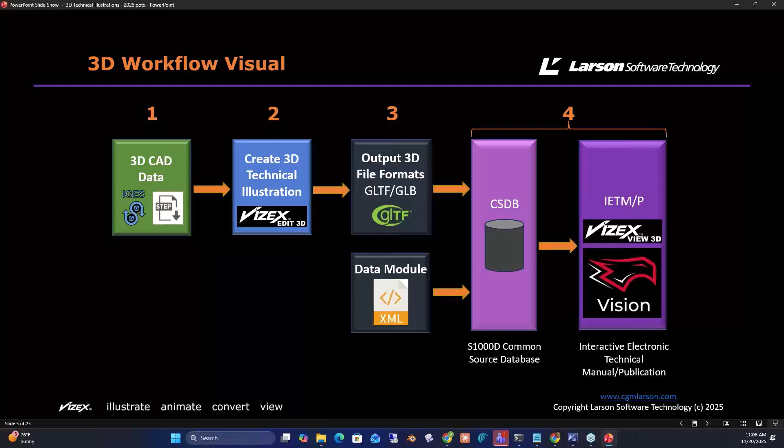From there, we're not actually going to create any XML today, but we will show the IETM. Both those components would go into the CSDB, so even the GLTF would go in there. It would probably have an ICN number because it's media, or if it's an S1000D project - it could, if it's not S1000D, then it could be named pretty much anything and stored anywhere. And then we're managing the data, so this could be a content management system of some type. Finally, we'd distribute this information in an IETM, where that data is built into something the maintainer or end user can view in a way that enables them to do their procedures and so forth.

So the first step is actually getting the data. How do we get it? Where do we get it from? Well, primarily it's going to come from a CAD system, from engineering. The exchange formats that we support within VizEx Edit 3D, we support more than these, but the primary one has been STEP so far. Most organizations will export the CAD data into this format. It's an open format, and it's very rich, with all the geometry and the model tree that we need to start working with it for creating technical illustrations.

Most CAD systems will support STEP, probably pretty much all of them. It's useful because it's usually readily available from the engineering department. One main consideration when you start using this data is file size, so you'd need a computer capable of handling quite large files. We do some optimization as we bring them into our system, but to initially use them, you'd need a machine of reasonable specification.

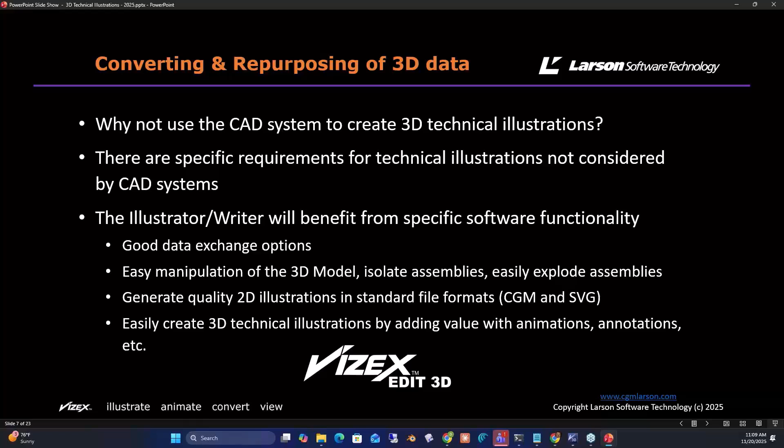So as an overview, what kind of illustrations are suitable for 3D? We think it's pretty much everything you would do in 2D - exploded spare parts illustrations, procedural illustrations for assembly, disassembly, scheduled and unscheduled maintenance, repair and overhaul. Even operational and instructional illustrations, and specialist illustrations that may have transparency to see inside the equipment, cutaways to see inside with sectional views, and functional illustrations showing how it works. All of these probably apply to 3D as well as 2D.

So how do we create them? In VizEx Edit 3D, we can import that CAD data - STEP and IGES files - and we save them when we bring them in as what we call a .vx3d file, which is our kind of native format. You would say, well, why do we need another 3D format? Aren't there enough on the market already? But the reason we did this is that we can optimize the file size.

We can work with them, save changes to the file easily, go back and work on them again, edit them, or if we don't finish them, revisit and start again to finish the illustration off. So we didn't really find a suitable format - certainly STEP would not be suitable to do that with - so we created this VX3D file.

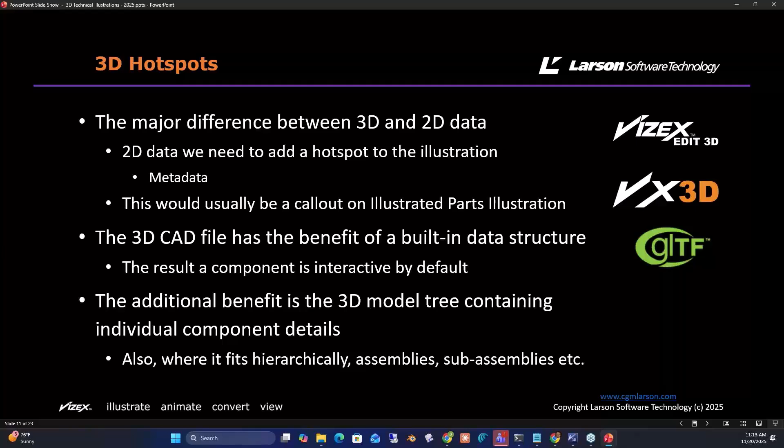The other benefit is that we can animate this as well. So the data structure really allows us to select those components, perhaps move them, control their visibility, and then transform them as well. Like we could rotate them, scale them. And this is all in 3D, so this ability is kind of built in.

We'll talk about GLTF and GLB a bit more in a second, but GLTF and GLB give us that ability to capture that animation, record it, and then play that back in an environment suitable for the maintainer. So I'll talk about the GLTF. I think it's the next slide.

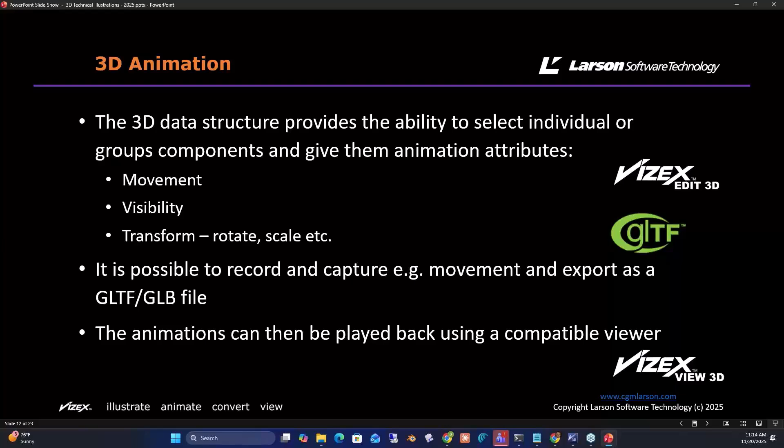It is. So why GLTF? The main reason we selected this format for our output is that it's an ISO standard, so it's an open file format, which we felt is important for standards-based industries, especially people who use S1000D, companies using S1000D.

That the narrative really is to use open file formats. It's web native, so there's no plugins required for viewing, which is really a good thing with security and things like that. It supports animation to be part of the file, so movement, visibility, rotation. It's efficient, it does compress the file down, so it makes the file lighter.

It's got good universal support from some of the large vendors such as Microsoft and Adobe. With Microsoft you can actually insert GLTF files or GLB files into PowerPoint and Word and so forth. So we really think that gives everything a future proof, that this format is going to be around for a substantial number of years. So that was the other reason for choosing it.

You probably heard me say GLB. So the GLTF and GLB are one and the same thing. It's just a different way of actually saving the file.

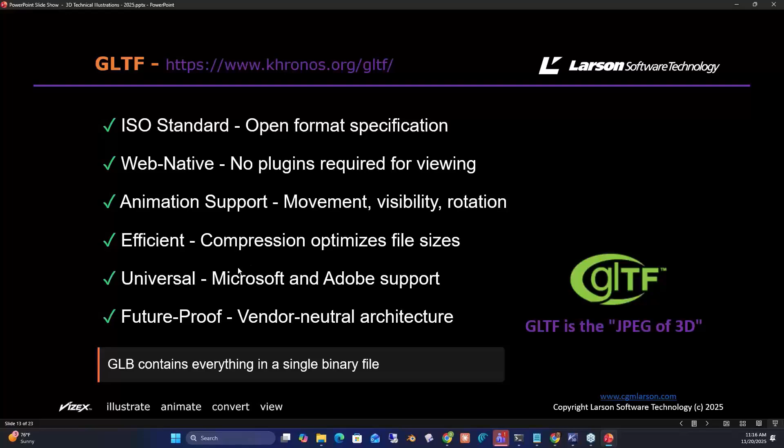Oh dear, my audio's gone. Don, could you just reinforce that you still can't hear me? I'm talking at the moment. Okay, I'll carry on talking. Hopefully the audio returns. As I said, we've had some technical difficulties today.

So just moving on to S1000D and what the stance is from S1000D on 3D. There is a chapter in the current spec, it's kind of a bit outdated, but there is no 3D file format specified as well, and that's why we really selected GLTF.

Okay, very good. So the next part really is a demonstration. So I'm going to go into VizEx Edit 3D. Hopefully you can all hear me. And we'll just go through the process I've just outlined in the previous slides.

Okay, so let's just go to VizEx Edit 3D. So this is the interface. We've tried to make this as easy as possible to use, as I mentioned earlier.

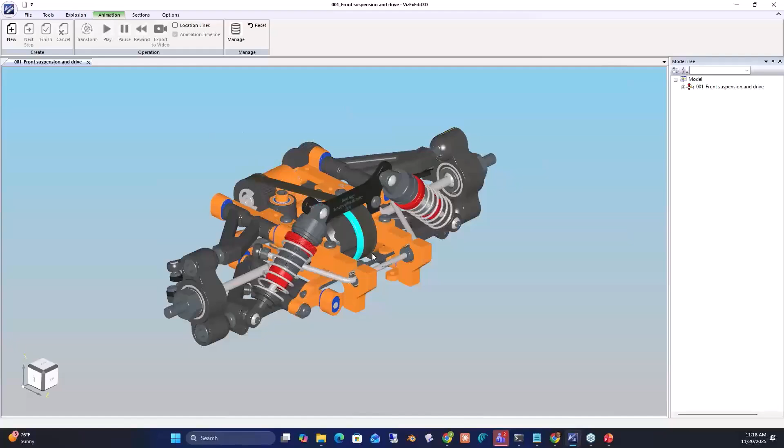This model is fairly large. It's not an enormous model, but I've just brought it in for expediency, just for the webinar. So this is the whole of a front suspension unit. I can move this around pretty easily. I can zoom in, so it's pretty easy to use the model, even though it's quite a large one.

So at this point, I could say I want to select a particular part. So you'll see on the right that that part is highlighted in the model tree. So any part I click on here, then that's going to be highlighted. If it's part of an assembly, you can begin to see, on the right, the whole of the part subassembly here, which you then could use perhaps in a separate illustration. And I'll show you how to do that next.

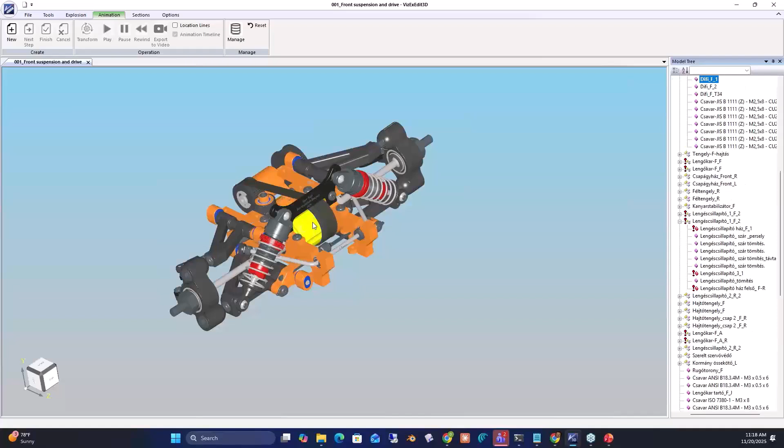So I'm going to use this particular one here, which is part of the differential unit. So if I select this level here, now I've selected all the differential. So what I could do at this point is just right click, and I can save that as a VX3D file.

And I'm going to put it onto my desktop. I'm just going to change the name of it slightly so I can recognize it, and save.

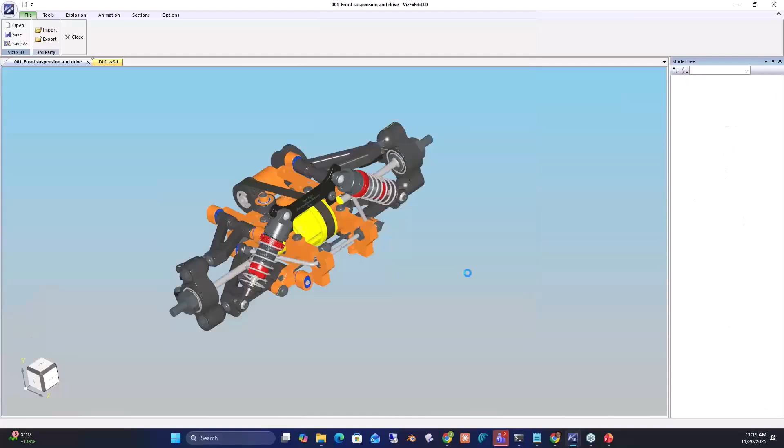Okay, nothing really happens here, but if I now go to File and Open, I should see that file I just saved, and I can open it, and I'll now just see that particular part. You can see there's actually one other sub here below that, but if I click, I should be able to see the parts highlight again on this side. So now I begin to work with this kind of smaller assembly within VizExEdit3D. So let me just move this over a bit slightly.

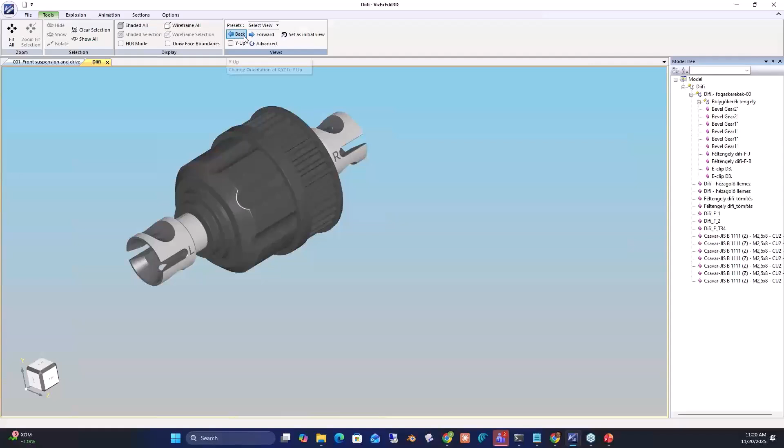So what I'm going to do here is change the view. I could move it around—we've built in an isometric view because we still think that's relevant. Let's move it to this angle here.

And say I just wanted to explode this model. So I can create a new explosion for this. This might be used in a kind of 3D spare parts catalog, perhaps.

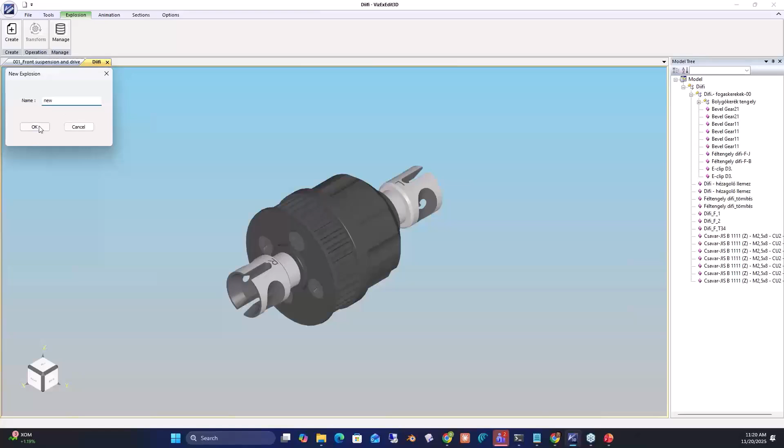I move into this panel here, so I've got some options. I could move parts individually, or I can say I want to move these automatically. I'll just zoom down a bit and pull these away. I can nominate the axis to pull away on, which in this case is the x-axis. So I can just keep pulling these away, and then I can still reposition them.

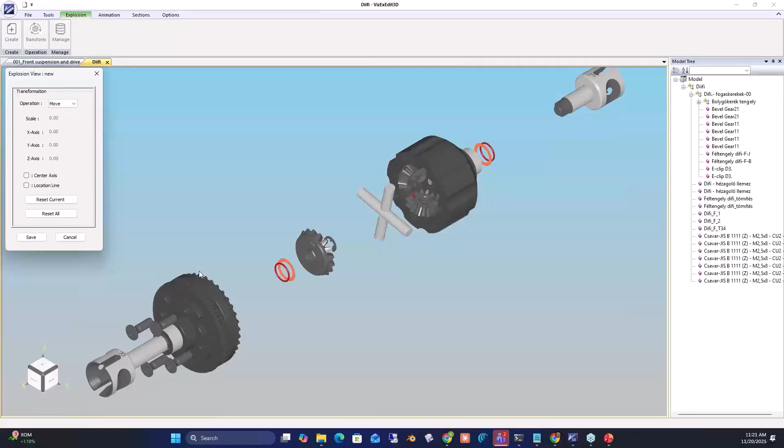So I can say move, and move individual parts on here as well, so I could begin to separate them out however I'm going to use this. I can pull these parts and move them along that grid line, so I know they're okay with the grid. I think you get the idea that it's quite easy to move these parts and pull them away.

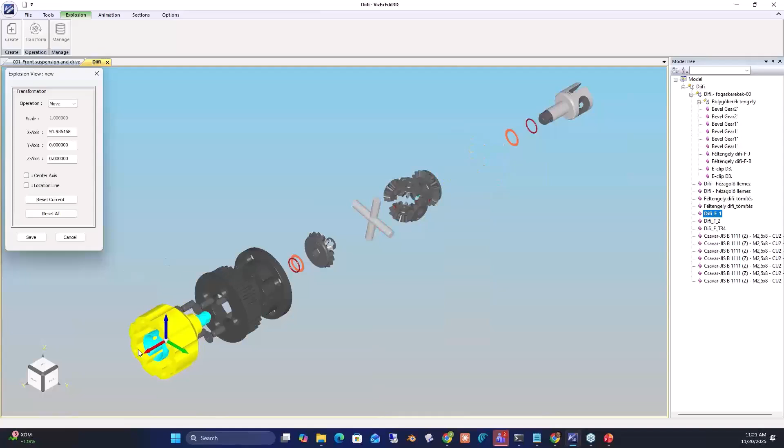So that auto explosion just gives me the ability to begin with to separate everything out—bolts and so forth. You can see all the bolts there.

And then if I save this, that saves it as a particular explosion. So if I go to manage, I can go back and revisit that and edit it, carry on, or create multiple views of this one assembly and choose the one that's correct for my particular use case.

So hopefully you begin to get the idea that with big models, I can break them down and begin to work with the sub-assemblies and so forth.

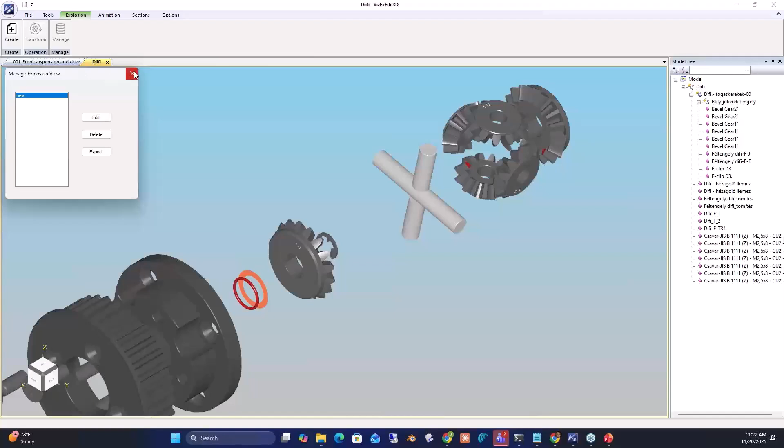Okay, so what I'm going to do next is cancel this for now. I'm going to import another model similar to this one, just to show you the animation part. This also gives me the opportunity to show you the supported import formats. As we mentioned, there's IGES, STEP, VRML, GLTF, and OBJ is the latest.

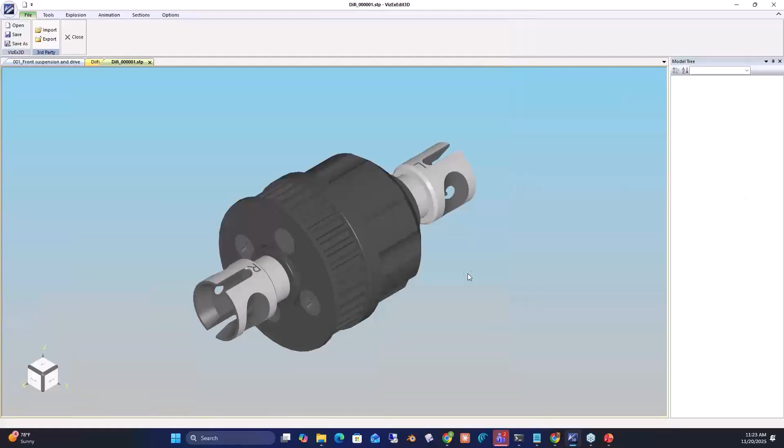We're going to be adding more as we go along. But I'm just going to say STEP, go to the demo folder here, and open this. So this is a similar file to the one I've just used—it's a bit more attractive, it's got some color to it.

And this time I'm going to animate as opposed to explode. Same kind of theory—I can actually now move things, but capture that movement. So I just use the animation tab. I'm going to say new.

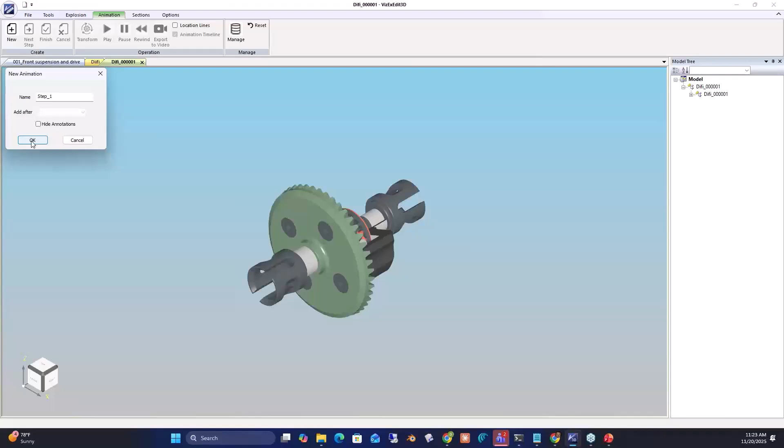And because it's probably going to be a procedure, we automatically name this. You can set this up however you want, and you can change this name. But this would be step one of this procedure.

Okay, so I'm going to select this part here. Now at the bottom you'll see this timeline, and that part I've selected automatically adds to the timeline. I get some directional arrows. I could just move this—I have other options we'll look at in a second, but I'll just move it away from the main assembly and apply that.

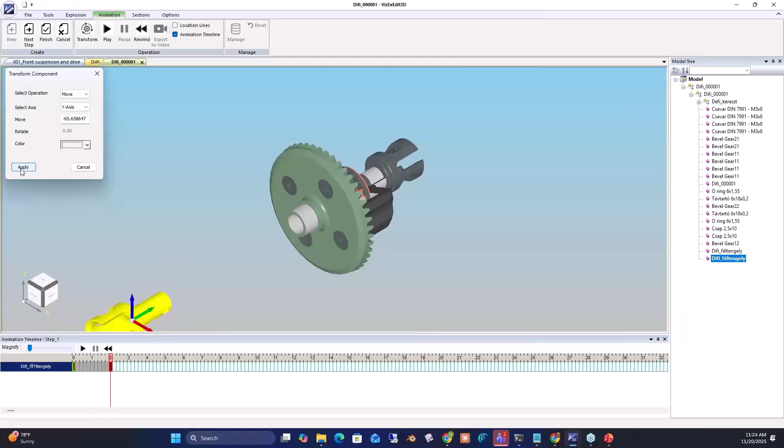So now we've not only moved it, but we've captured that movement. If I go to the play button on the timeline, I should be able to see a preview of what I just did. So this is taking 2 seconds.

So what we've done is created a default time, but you can still go in and edit this, drag it along to make it 3 seconds if you wanted to. It takes a longer time to get to that position—it's going the same distance but slower. So you can still edit the timeline; we just put some defaults in there as a starting point.

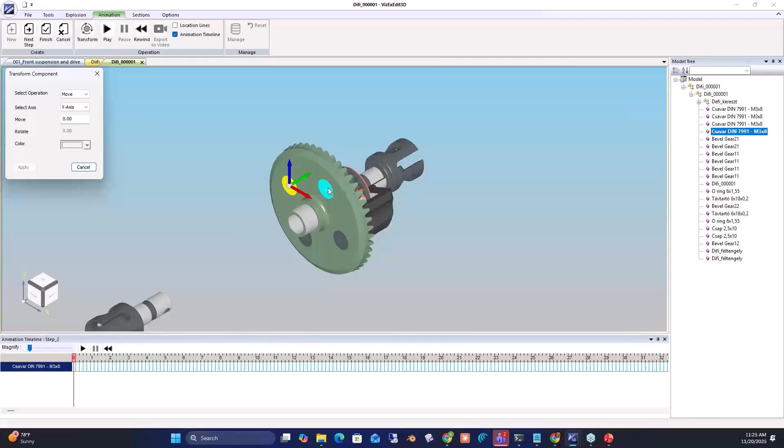So I'm going to go to my next step, and this will be step 2. At this time, I'm going to move the bolt. Just to show you, I can select more than one item at a time using the Shift key, which is pretty standard in most 2D programs. So I can drag these away as a group, and again it's added into the timeline, and I apply that again. So this will be step 2, and next step is obviously 3.

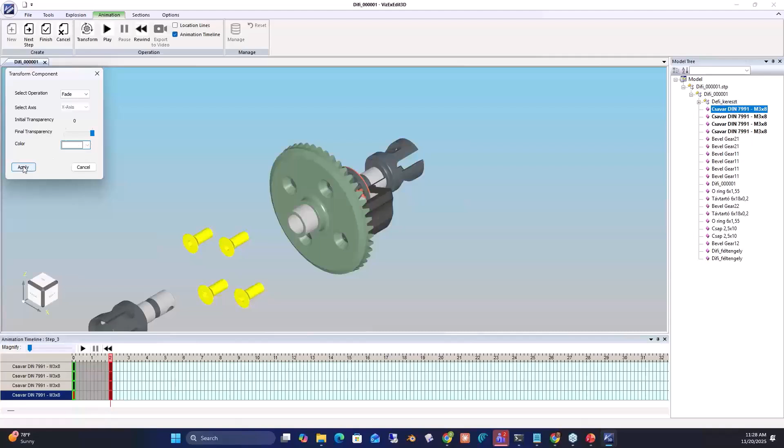So what I was going to show you here was I was just going to select all these 4 items again. And instead of moving, I was going to fade the items. So what that means is that they will actually disappear on that step. So I can apply that. And now next step again, that gives me some space to actually move this item into, and apply. Okay.

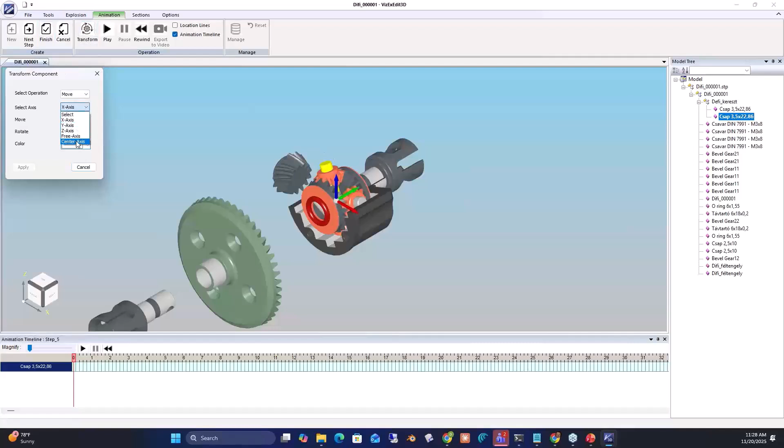And create another step. And this time I'm going to move this item out here. So you can see this particular one is on a kind of a perpendicular axis, so I can use center axis to move this. So it picks up the axis of that. Again, apply. Okay.

So now I'm going to finish, and we should see all those steps now in our Manage Animations dialog. So I could play all of them here at this point. So this should actually play all those particular steps. So the bolts come out, they fade away, and then 4 is the main, and then there's the perpendicular.

Okay, so one of the things we built in is the ability to create a reverse of this. So if I've got step 4, 5, I can create a reverse. 3, that was the fade, so I probably don't want to create a reverse of that. And then step 1 was obviously the first one. And let's play all again.

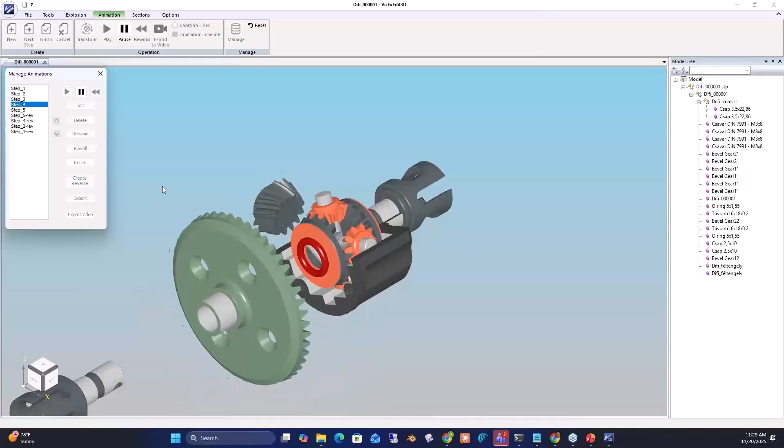So this was one of the things our customers suggested, that they wanted to obviously disassemble, but also to assemble all the components again. So now it should reverse back. And we can reorder these. There's a lot we can do in this dialog, but to get the finished article.

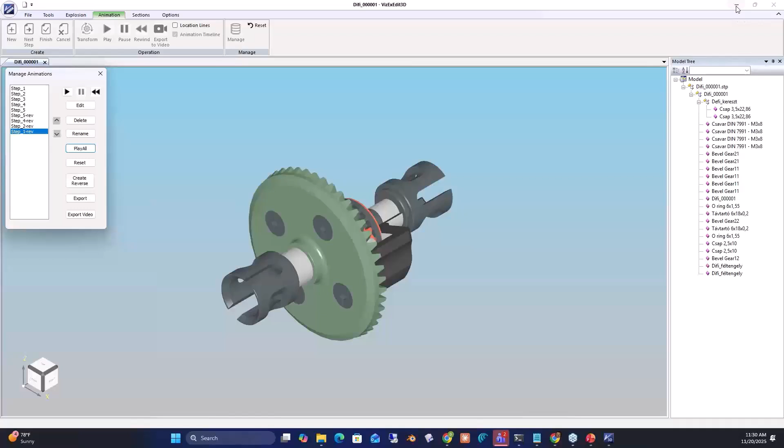Okay, so now hopefully you've seen how we can create that animation. Apologies for the technical difficulties. I'm going to go back to the slides. Oh, sorry, one thing, let's just go back.

So now once I've got this animation, I would export, and I would export as a GLB file. The reason we use GLB is it's a binary file. Everything is contained within that file. And that will include all those steps that I've created as well, which would serve as IDs when I want to link to my XML. So that's quite important, as you'll see as we go along.

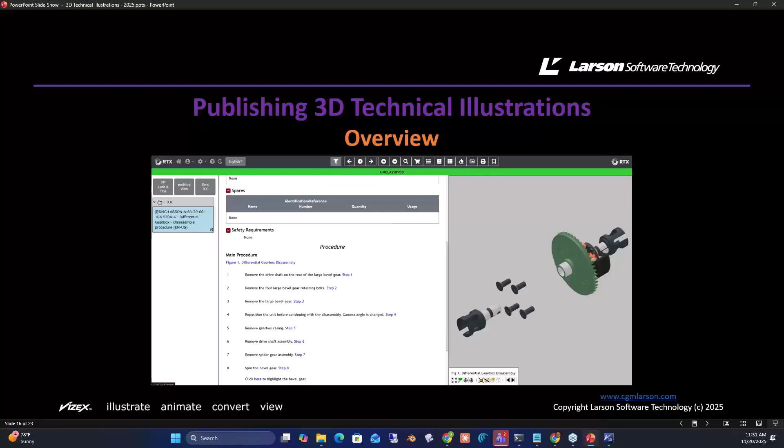Okay, so I want to give you an overview of how do we publish this information. So how do we then make it available to the maintainer? So the kind of 3 essential parts. One, we've just created that GLB file in Vizex Edit 3D with the animations and so forth. The other part would be to create your XML. I'm not going to show you that today. So that could be done in any XML editor from different vendors and so forth.

Kindly, Raytheon have made available a demonstration that they've done. They've integrated the final part. They've integrated Vizex View 3D into their IETM called Eagle Vision. But this could be integrated into any solution from any vendor that kind of supports S1000D or is distributing their information within a browser environment. So it works with any kind of HTML browser. So it doesn't even have to be an IETM. It's just that we wanted to try and show you something real today, like a real life example.

So I'll show you the procedure in the demonstration, but basically this would be your XML on the left. This is just an extract perhaps from that. You can see that when we click on the hyperlink, which will be here, then this event is triggered, which would be step 1. And step 1 is really that ID that I created when I create the animation, and that resides within the GLB file. So we can then access that, and then when we click that step, that part of the animation will play back.

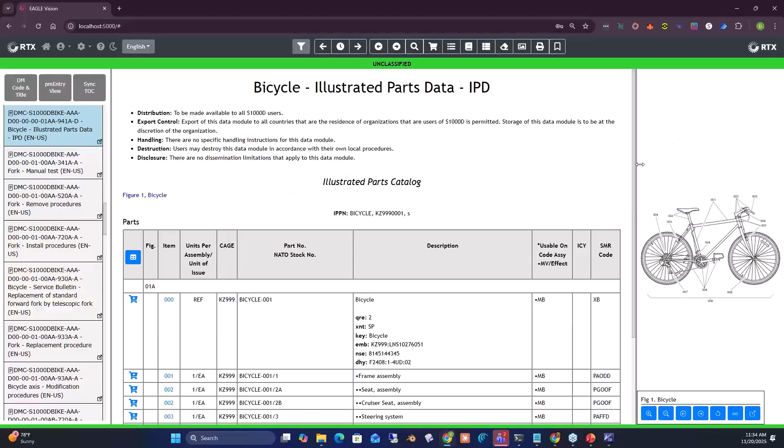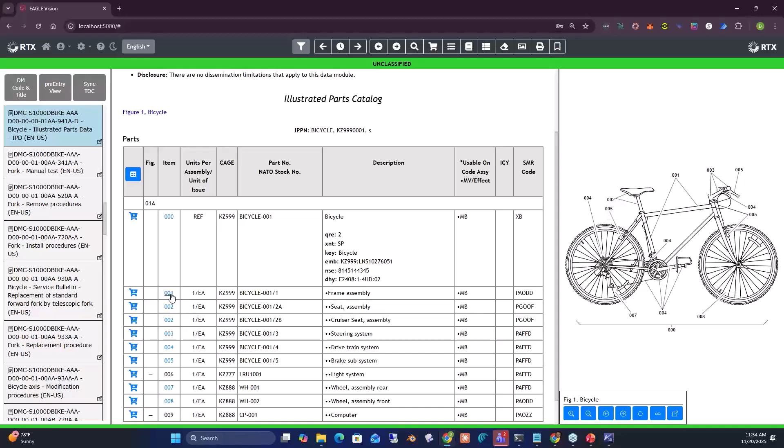So all the data modules are down the left here. I'm just going to go to one particular one if I can find it. I think this one here. So this would be more your traditional kind of 2D illustration, spare parts in a way, or it could be a procedure. But this would be your CGM or SVG. You would click and you can identify the part, or you could go this direction.

So a lot of you are probably familiar with this already, you can have interactivity between the 2D using CGM or SVG, and that's obviously a technology that's been around for some time. So you can have that interactivity built in when you hotspot a 2D file. This is really the vehicle to view that.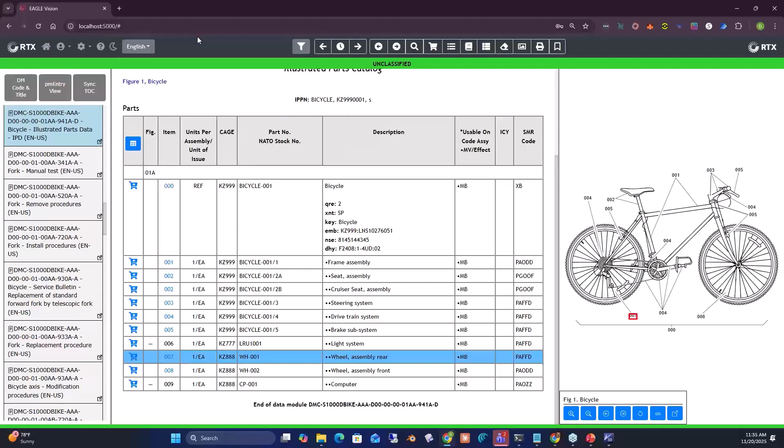So I'm not going to give an in-depth demonstration because I wanted us to move back to the home button. And here we've just got a very simple demonstration of that 3D data. So if we just go back here to the data module, you can see there's the model I've just been demonstrating, but now we're in the ITM.

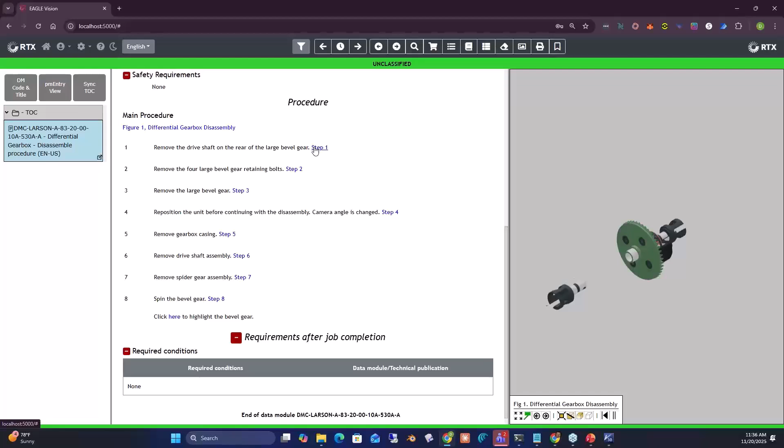The next step, which I didn't show, is that you can change the camera angle. So you can build in a camera. If you want to actually view from a different angle, that's really straightforward. If we can just manipulate the model within VizEx Edit 3D, you can capture a new camera angle.

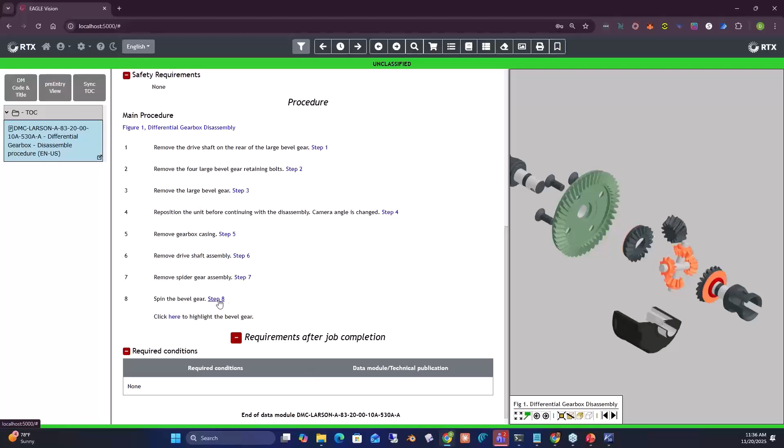This is just going to remove that gearbox casing. Then we move a whole series of parts away at the same time. Again, the same - so you don't have to move individual parts. You could, as I said earlier, select groups of parts. And I think this one will show that we can rotate within the animation as well, and even highlight it if you need to with a different color. We've now built in light flashing as well, so it really highlights it to the end user.

So that's really a demonstration of what you can do once you've got the 3D. It can go into a kind of a real life ITM for the end user.

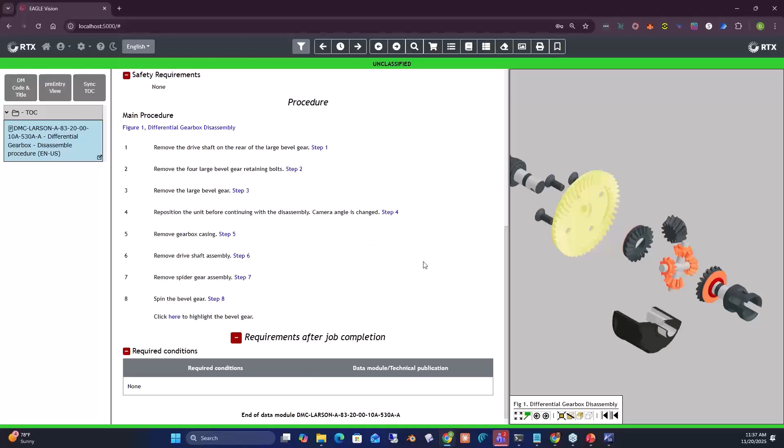So I'm just going to summarize what we've been through. 3D illustrations, I think they really do provide a lot of value. The 3D data gives us some easy to work with interactivity, purely down to that built-in data structure. GLTF and GLB, we think it's an ideal file format for distributing this information. It's light, it really optimizes that. It can contain things like animations and so forth. And VizEx Edit 3D really gives you the ability to create those easily.

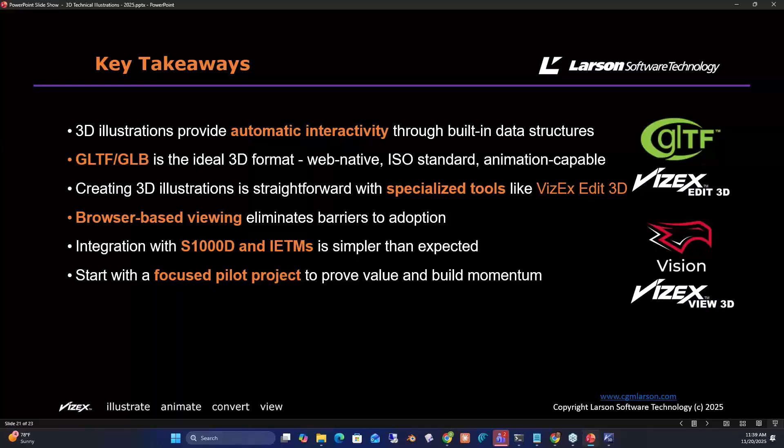Browser-based viewing - again, GLTF, GLB allows us to do that. Hopefully brings down barriers to adoption. So integration with IETMs, S1000D IETMs is possible. And I would recommend, if you're looking at this, is to start with a pilot project. Look at something that might be appropriate if it's difficult to convey a particular procedure, it might be good to show it in 3D as opposed to 2D. So that could be a good starting point.

So what we've seen today is VizEx Edit 3D for creating the 3D illustrations. VizEx View 3D is the SDK that allows the integration within an IETM or just the web browser. So you can contact me about that. We've seen Eagle Vision kindly from Raytheon, who provided us with that demonstration, so thank you to them. We'll distribute these slides, so if you can't make a note of that particular address, you can find more details there. But just to emphasize, VizEx View 3D can integrate with any kind of IETM.